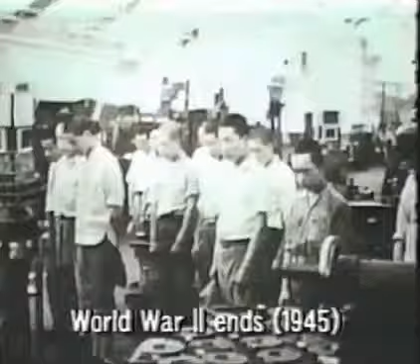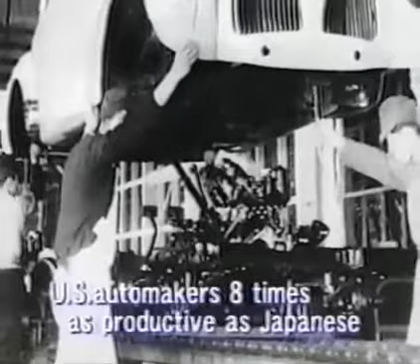After the war, Kiichiro passed on his dream to his cousin Eiji. He instructed Eiji to bring the company up to U.S. standards of technology within 3 years. That was a daunting task. U.S. productivity in automobile manufacturing was 8 times higher than Japan's, and Toyota was short of equipment and capital.

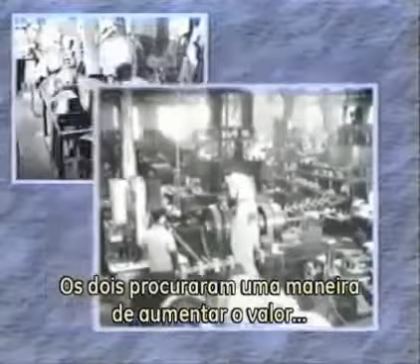So raising productivity was a pressing issue. Eiji assigned a machine shop manager by the name of Taiichi Ohno to develop a more efficient production system. The two men looked for ways to raise the value-added productivity of every worker. They did that by putting Sakichi's Jidoka concept to work throughout their operations.

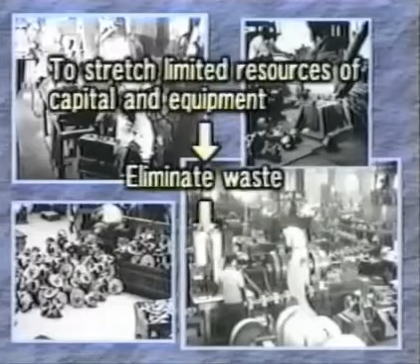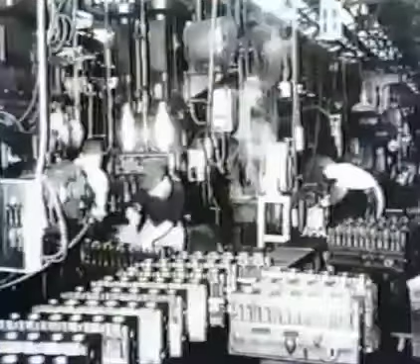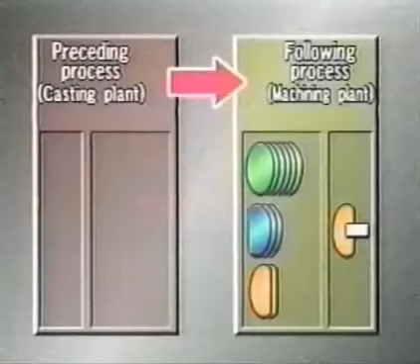They also looked for other ways to stretch their limited resources of equipment and capital. They did that by putting Kiichiro's just-in-time concept to work systematically. Ohno took a cue from the U.S. supermarket. He made each process the customer for the preceding process. In traditional manufacturing, processes delivered parts to the following processes regardless of what was actually needed.

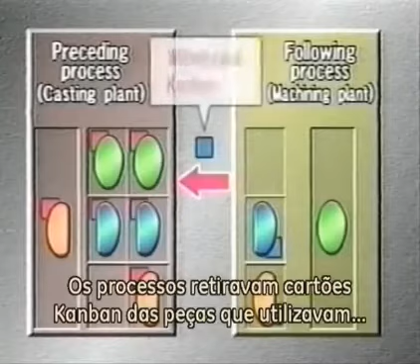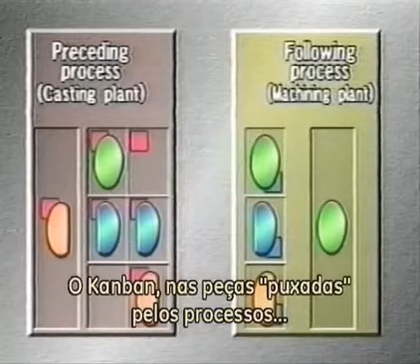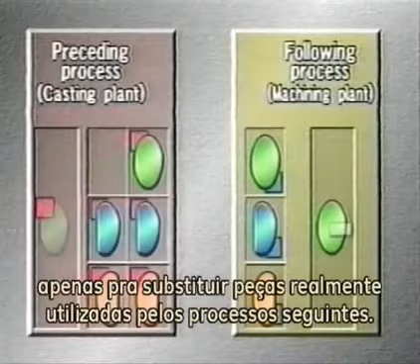Ohno devised a completely new kind of system. Processes used Kanban cards removed from parts they had consumed to withdraw parts from the preceding processes. Kanban on the parts arrayed by processes came off when the following processes withdrew the parts. They became instructions to make additional parts. The Kanban flow ensured that processes made parts only to replace parts actually consumed by the following processes.

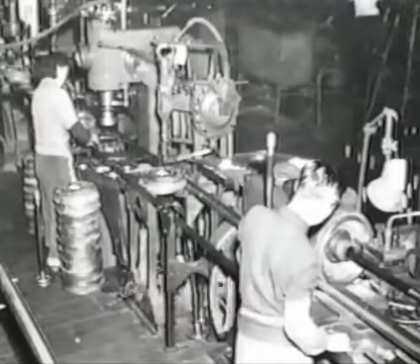Active cooperation by the people in the workplace would be essential to Ono's system. But at first, people were reluctant to give up their old ways of doing things. Ono took the initiative. He went into the workplace and taught people how to use his system. Eiji Toyota supported Ono enthusiastically in putting the new production system in place.

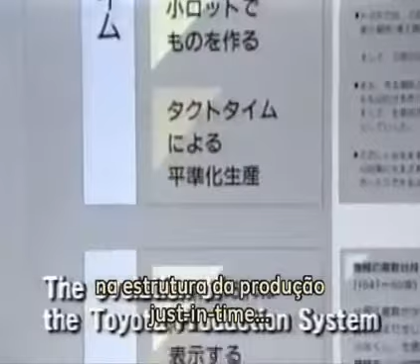A new production system gradually took shape on the foundation of just-in-time manufacturing and Jidoka intelligent automation. As the Toyota production system, it became a standard for manufacturing industries. The Toyota production system gained global attention after the oil crisis of 1973. Toyota recovered more quickly than other automakers from the crisis, and its production system received much of the credit for that resilience.

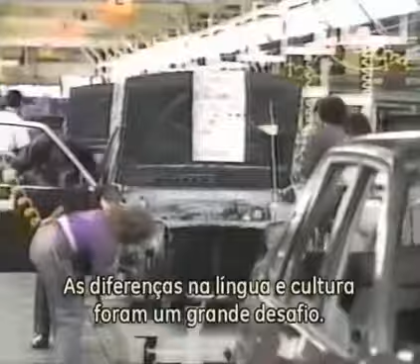General Motors Corporation approached Toyota about setting up a joint venture to make small cars in the United States. The two companies set up New United Motor Manufacturing Incorporated in California in 1984. Differences in language and culture presented big challenges, but the spirit of making things well knows no borders. People accepted the Toyota production system, and the Toyota-GM joint venture became the highest-ranked automobile plant in the United States for quality. It became a symbol of successful industrial cooperation between Japan and the United States.

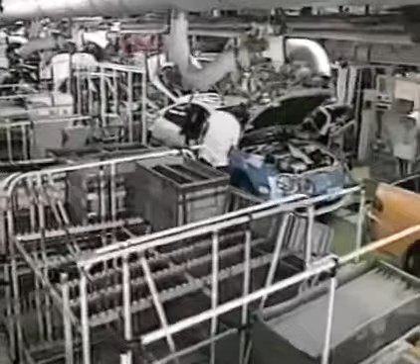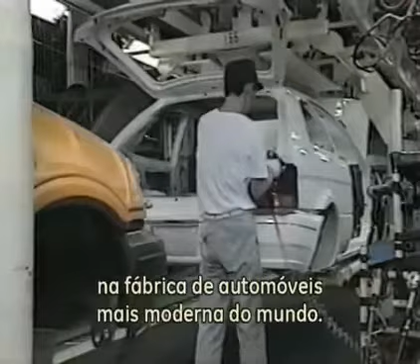A book published by the Massachusetts Institute of Technology hailed the Toyota production system as the machine that changed the world. Today, the Toyota production system has gained a worldwide following. Let's see how the system now operates in the world's most modern automobile plants. The trucks that deliver parts to the plants carry a variety of items in each load. That allows each truck to travel fully loaded, which minimizes trips and thus reduces traffic congestion.

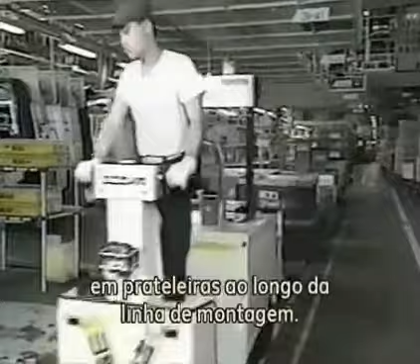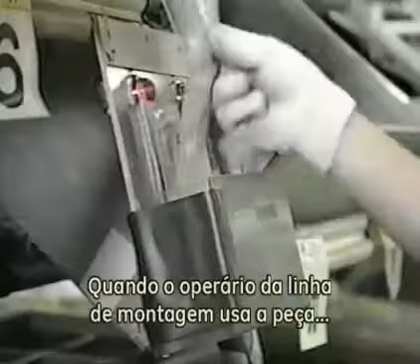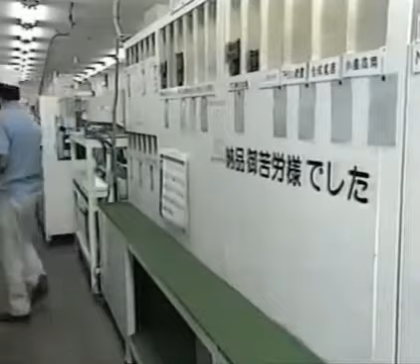Forklifts carry the parts unloaded from the delivery trucks to racks alongside the assembly lines. When people on the assembly line use the parts, they remove the attached Kanban cards. The Kanban get picked up regularly and sorted. The delivery truck drivers pick up the Kanban for their company or companies before leaving. Back at the supplier's plants, the Kanban become orders for withdrawing additional parts. Sorting arranges the Kanban according to area in the plant.

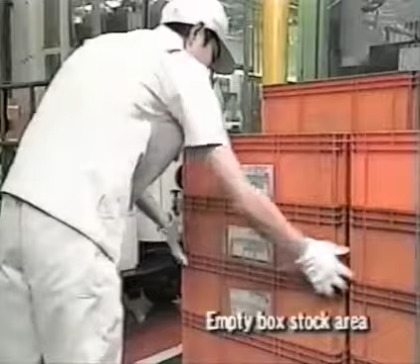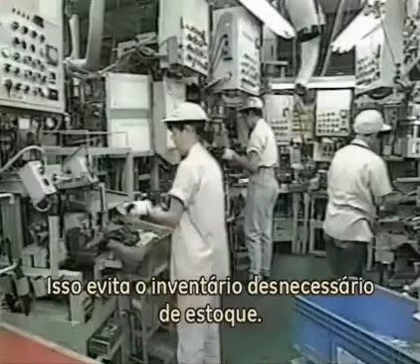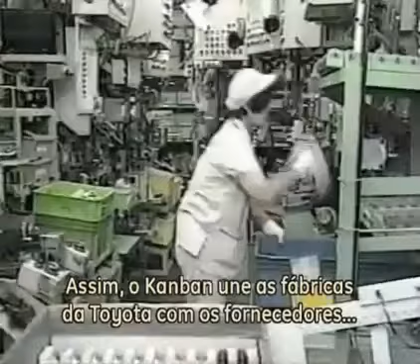Shipping personnel exchange the Kanban and empty boxes for full boxes. The production processes in the plant make additional parts only to replace parts that have been withdrawn. That prevents the wasteful buildup of inventories. When the shipping personnel have gathered a full truckload of parts, a truck carries the parts to the vehicle plant. Kanban thus link Toyota plants with suppliers' plants, as well as linking the processes inside the Toyota plants. Just-in-time manufacturing minimizes inventories, eliminates waste, and maximizes productivity at all the plants that participate in the Toyota production system.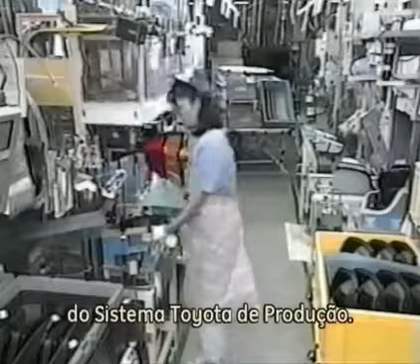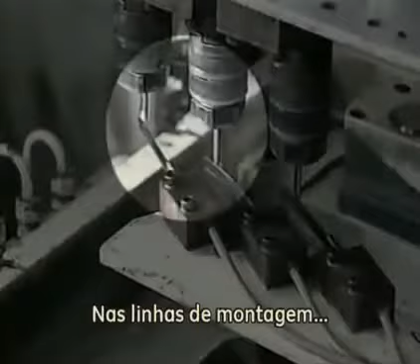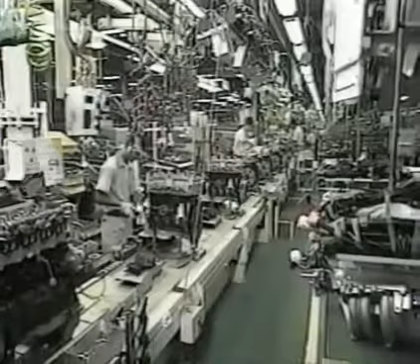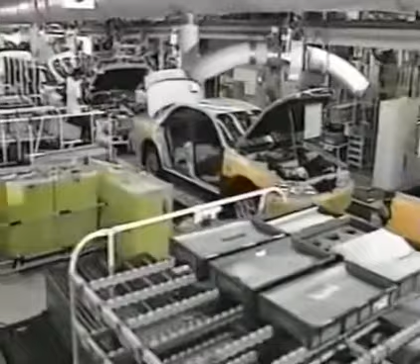Jidoka Intelligent Automation also continues to play a big role in the system. On automated machining lines, numbered lamps light up to call attention immediately to any problems detected by sensors. On assembly lines, the employees themselves have devised countless Jidoka measures to prevent defective work. So Sakichi's concept continues to prevent waste. The idea is to build quality assurance into every process, and it works.

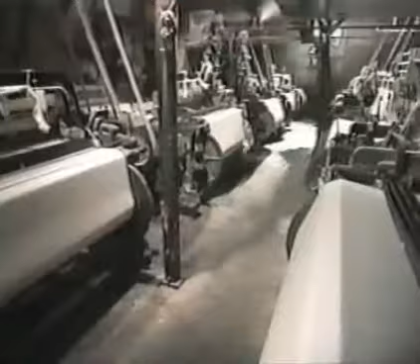The foundation for the Toyota production system has been established by Sakichi's Jidoka Intelligent Automation and his son Kiichiro's just-in-time manufacturing. Taiichi Ohno and others put those concepts to work systematically with the strong support of Eiji Toyota and his passion for manufacturing.

The Toyota production system continues to evolve in response to changing needs and circumstances, but the fundamental concepts are eternal, including Toyota's commitment to continuing improvement in every phase of products and operations. Those concepts underlie a lasting contribution to enhancing the quality of life for people everywhere.